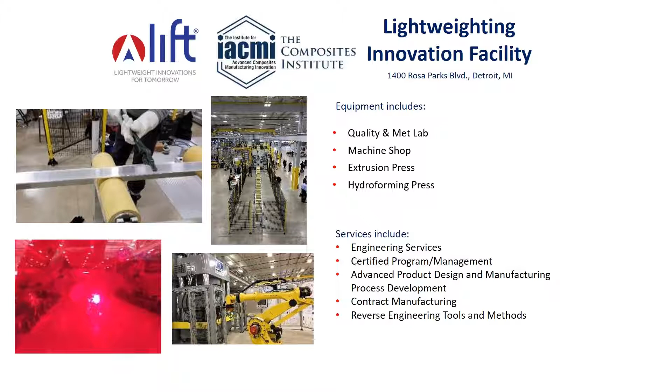You can learn more about a number of our projects as well as our education and workforce development initiatives on our website at lift.technology. As I mentioned, we are based here in Detroit, so please come by and visit if you're in town. We share space in our lab with IACMI, another Manufacturing USA Institute, which focuses on composite materials, so we have lightweight metals and composites in the same place. You can also follow us on social media at News from LIFT to tell the world about the good things you heard today from Munro and Associates, and when you come visit us here in Detroit.

A few highlights from the lab I mentioned, our lightweight innovation facility that we share with IACMI here in Detroit. You can see on your screen a number of the large-scale pieces of equipment we have ready for your use. So please give us a call if you have ideas for lightweighting projects, or a problem you're looking to solve. Contact us at lift.technology, come visit us, and we'd be happy to work with you through those problems with our in-house engineers or any of our network experts.

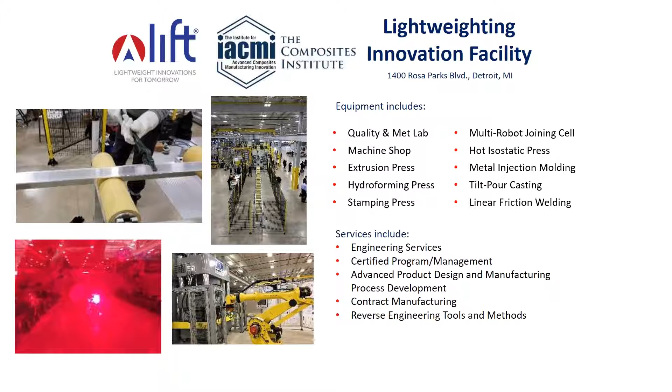I'll highlight the linear friction welding machine on the equipment list. It's in the process of being installed — we are thrilled to have that piece of machinery. We just took possession of it last month, so it is being installed now. It is the largest linear friction welder available in the country. If you wanted to do the kind of work you can do with this machine, you'd have to fly across the pond to Europe. But we are very proud to have it here in Detroit.

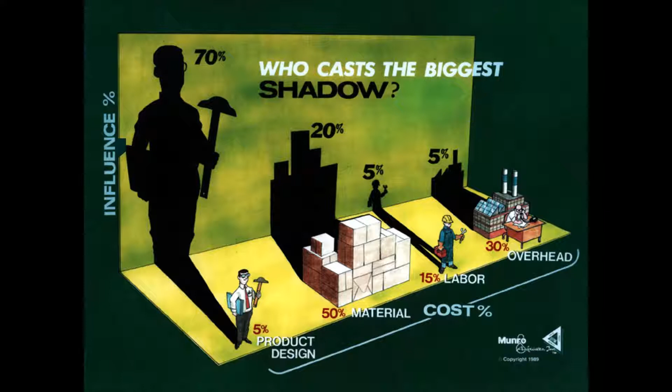And so moving over to the right, you can see in your budget, you may have 5% for product design, 50% material, 15% for labor, and 30% for overhead. And what this means is that all the way out on the right-hand side where you're manufacturing and dealing with overhead, yeah, we're all familiar with VAVE programs, but a VAVE effort, once you're in manufacturing production, is only going to have perhaps a 5% impact on the total cost of that product. And if you can bring home a 5% cost save, a lot of folks are really excited about that.

But what this chart says is that you, as an engineer and a professional in this industry, should be devoting more attention to the left-hand side of the world. That would be your product design, and you should be bringing in manufacturing, materials, purchasing, and everyone driving towards a common goal that is going to make the company more profitable.

So in the past, yeah, you've seen these BASF commercials. They don't make the product, they make it better. Well, we don't make anything here at Munro and Associates, but what we do is we bring value, quality, and profitability to the customers that we collaborate with.

We do that through lean design. In fact, lean design is a registered trademark of Munro and Associates, so that's how long we've been at it. And it's important, especially these days, where companies are measured by their stock performance, not just the profitability of the company, but profitability drives stock value.

And we have a number of examples. If you folks have time to look at some of my LinkedIn articles, you'll see there's a correlation between lean design, profitability, and shareholder value. So let's get on with the presentation.

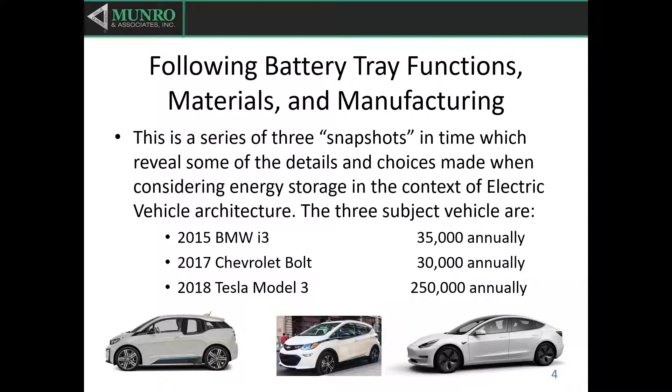The 3 subject vehicles that I'm touching upon today are the BMW i3, Chevy Bolt, and most recently we did work on the Tesla Model 3. Off on the right, you see I'm talking here about what the annual volumes are, and this is very important when you start to calculate the profitability of a product. Obviously, you want to match your manufacturing methodology to the volume that you're ultimately going to sell that vehicle in.

And just another word now, BMW has hit 35,000. That was their peak number for the BMW i3. Chevy Bolt is approaching 30,000 annually now, and I would expect to see that number growing, but not as rapidly as Tesla Model 3. They're over 200,000 units a year now, and they're going at this from a volume perspective. They're really trying to change the marketplace, and quite frankly, there's a lot of really brilliant engineering in that product. We'll set aside the fit and finish for now.

Okay, so first vehicle up by the vintage of the vehicle was the BMW i3 with the range extender. And these are just some of the vehicle specifications. When we talk about the range here, we're strictly talking about battery range, and this is 150 miles. The vehicle weight, 3,000 pounds, is really rather light when you start comparing it to the Chevy Bolt and the Tesla. Tesla has a body structure which is incredibly robust, and in the opinion of many, including Sandy Munro, a bit over-engineered.

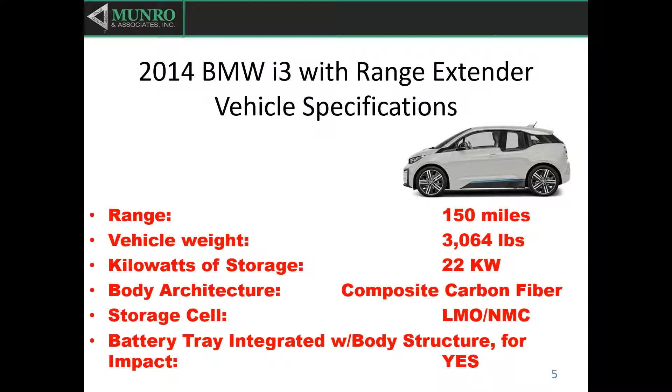We put all of our subsystems into what we describe as zones, because we don't always have the manufacturer's part numbering system to work with, and zones are common, so it doesn't matter if we're looking at a Fiat, a Ford, or a Chevrolet. All of those subsystems are broken out into the same zones.

We call zone 4 powertrain and driveline, the bin that we're going to be putting all of our battery, electronics, and cooling systems in. The last line on this page here is kind of important: this battery tray is integrated with the body structure for vehicle impacts. So FMVSS 214 is something that you cannot meet without having the battery tray in place.

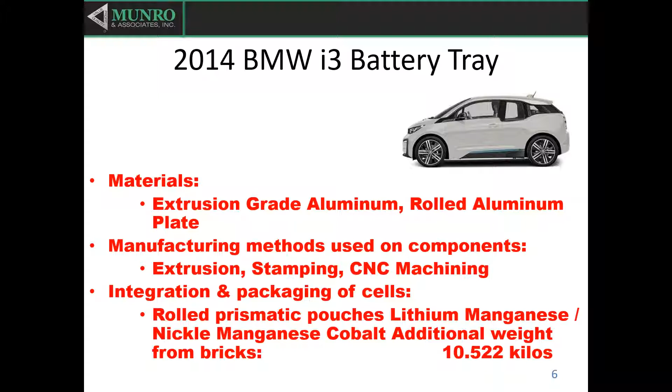Basically what you'll see when you analyze the structure of the vehicle is there's a big front end aluminum subframe, a big rear end aluminum subframe, and then tying those two together is the aluminum battery tray structure in between. The materials in the battery tray for the BMW include extrusion grade aluminum and rolled aluminum plate, that's for the base of it, and then there's a thin sheet metal aluminum cover that goes on top of it just to seal out the system from the environment. The manufacturing methods used on the components in this battery tray are extrusion, stamping, and a lot of CNC machining.

Integration of and packaging of the cells. Now, 3 different manufacturers have made the cells for these vehicles. BMW has Samsung prismatic pouches with a manganese, nickel, cobalt additional weight from the bricks — I'm going to talk about the bricks in just a moment — is 10.52 kilos. These bricks are basically the containers which protect the cells, the anodes and cathodes, from any damage in the vehicle environment.

The BMW battery tray is all aluminum. Because the assembly is completely done in aluminum, galvanic issues will not arise as they do in the Tesla Model 3 tray assembly. We'll talk in a moment about that.

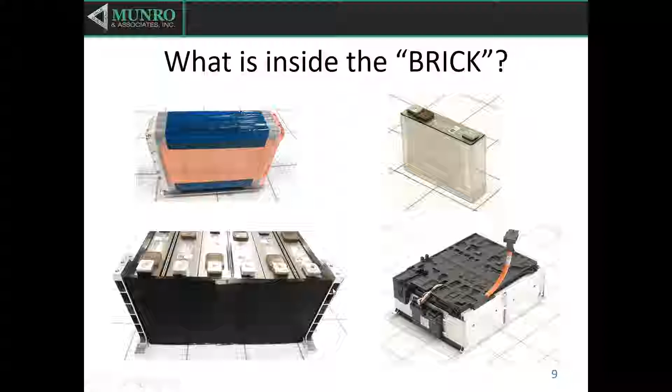Now, all of those little individual cans are placed — you can see them in the lower left-hand corner. There are 6 being placed here, and this is kind of a unique breakout of the battery tray because it has this end weldment taken off, and you're looking directly into that brick assembly. This is an insulator for thermal and any shifting that might occur within that brick, and there's very little movement within there, I can tell you that.

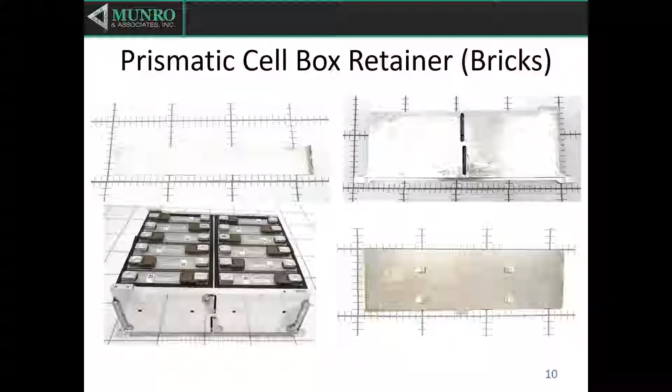It costs you nothing. So talking a little bit about what that brick is made of, kind of hard to see here in the upper left-hand corner, but there's a giant strap that ties these together. This is out here on the end of the brick, and internal to the brick, they're flanged in opposite directions. Wire welds, lots and lots of wire welds.

Here's the front plate. This is a flat stamping that has these piercings through it. And in the upper right-hand corner, you can see what you were looking into here.

This is an extrusion profile that is then subsequently machined. You can see all of this is being cut out, and then the attachments are being set up in the lower corners of that. So that's what that extrusion looks like in a side view, not an end view. You can see where they've cut through it in order to put these straps in the center, right through the assembly, and the outer plates onto the ends of it.

So there's a lot of material involved here, and like I said, over 20 pounds of weight ultimately in the final assembly. So we're going to talk a little bit about what the tray, the base of this system, is composed of.

There is a stamping on the bottom of the tray assembly, and that's the only stamped part aside from the lid in this whole battery assembly. Everything else is extruded, and you can see, again, lots of wire welds.

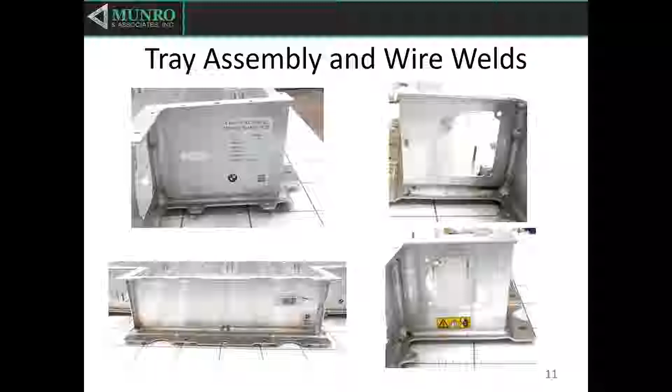This is at the front of the battery. You can see access ports here for the heating, cooling, electronics to come through. Another access port over here. A lot of fixturing is put into this.

And again, as you look at these welded corners, you can see that there's a lot of grinding being done on this. It's all managed very cleanly. But what I can say about this particular assembly is that this can be done almost anywhere.

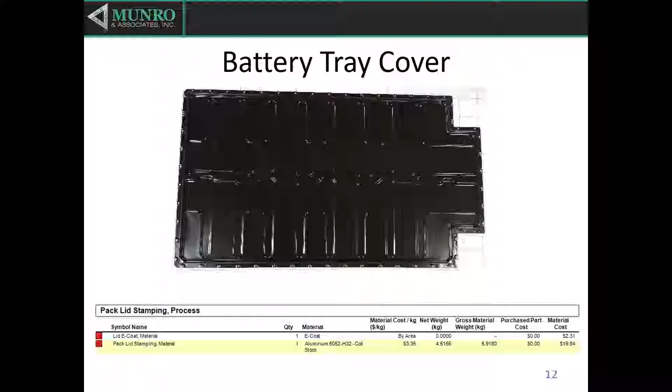You can see that the profile of the lower stamped plate is very thin, right? And because they're using all aluminum, there's no coatings on here, no galvanic reactions that they have to worry about, like on the Tesla, and I'll be showing you that in a moment. But what you see is that with this stamping and these extrusions, this can be manufactured just about anywhere in the world. Aluminum extrusions are quite common. There's nothing special at all about this base plate stamping.

This is the battery tray cover, and you can see I was asked to pull in some of the cost and data here, and I wanted to do that for this part. You can see that the E-coat is $2.31, and the stamping itself is at $19.84, and I believe that's with the coating on it.

So this, again, is one of the detailed breakdowns that we went through on the BMW. Every single part analyzed, and when you come out and visit, we can show you how our analysis tool, Design Profit, is used to track all of those costs and to order them in a sequence which reflects the actual assembly of the product in production.

So let's get to that base plate. We'll talk a little bit about the number of parts. 54 parts, 40 fasteners, 14 individual unique part numbers, 790 process steps to put this baby together. 30 fastenings, yes. And this is kind of important here, right the first time.

This is one of the methods and one of the metrics that we're used to track quality. And we can help you determine what your CPK value is for your process. We have a methodology, again, within Design Profit that we use to determine what that number is. There's formula bars in there.

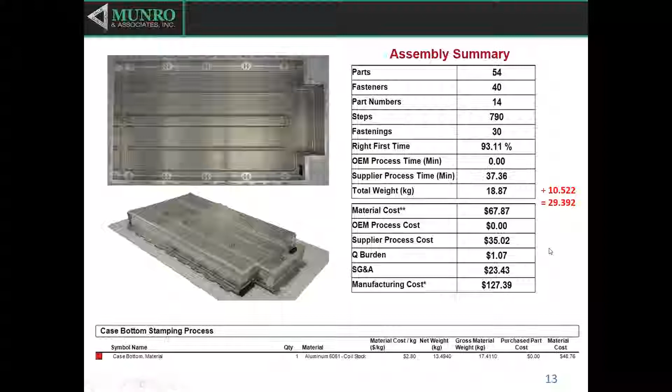18.87 kilograms. Now, having said that, you have to look out here on the right and see that there's an additional 10.5 kilograms of weight associated to those bricks I showed you just before this. So all of those bricks go inside here.

Okay, so underneath the battery cells, let's start up here on the upper left-hand corner. You can see those bricks in place, and underneath it is the cooling channel. Go back one frame. You can see these reliefs stamped into the lower component of the battery tray. That is where these cooling and heating management elements are put.

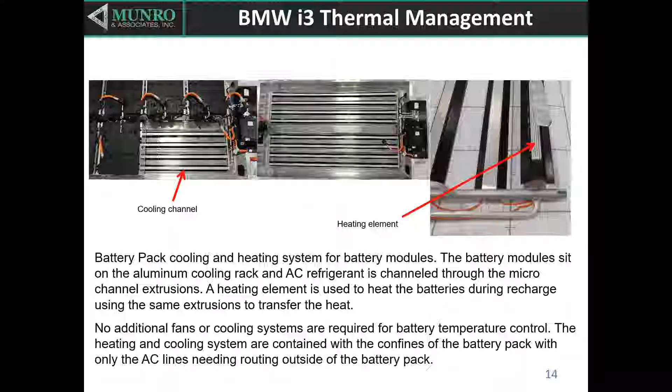So on top of that plastic carrier are two elements. One is the heating element, which goes underneath the aluminum ribbon that comes off of the manifold that they run an AC refrigerant through. So this is not a typical glycol system for managing the thermals here. This is actually AC refrigerant being run through these micro channels.

This is an advantage in that there are no heating and cooling requirements aside from that AC line that have to get into the battery pack. I'll show you a little bit more when we get to the Tesla that identifies how complex this heating and cooling thermal management can become.

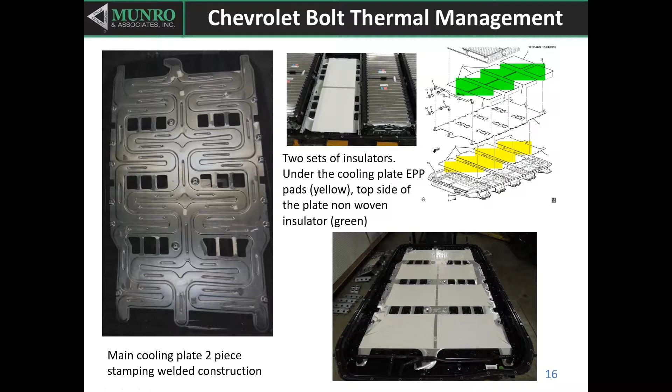These lower plates that you see here in yellow are expanded polypropylene foam. What they're doing is basically two functions. One, yes, they have thermal properties, and they're going to prevent road heat from coming through that steel pan and loading up your battery cells with heat from the road, reflected heat. So the EPP is an effective thermal insulator, but more importantly, it sits underneath the battery tray, underneath the battery cooling tray and the cells themselves, and it provides some impact and vibration isolation. Of course, you've probably been familiar with expanded polypropylene foam products in bumper applications. It is a great energy absorber, and therefore it seems like a natural fit in this application.

Not a bad job with regard to management of the thermals here.

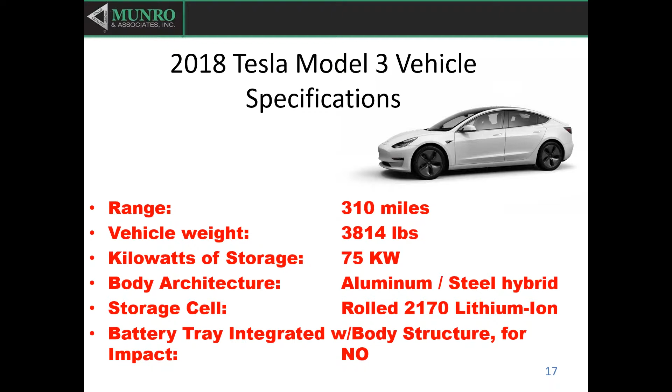This battery tray has no impact on the overall global torsional stiffness of the vehicle. You can remove the battery tray and it only has 3% impact on the global torsional stiffness of this vehicle. So it's really kind of a body structure that stands without the battery trays. However, in the future, I would look to see more of these battery trays integrated into the body structure and helping to provide the performance that's required for FMVSS 214, side impact primarily.

Talk a little bit about what this battery tray looks like coming out of the vehicle. You can see this is the tray as it comes out. That's a full complete assembly. This is at the back of the vehicle. This comes up under the rear seat, and this is where a lot of the thermal management is.

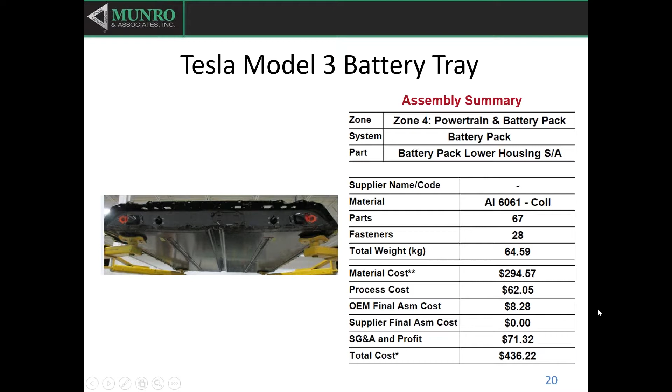So you can see a lot less parts involved in this battery tray, a lot less fasteners than the BMW. The total weight - you need to go back and compare both the bricks and the battery tray of the BMW, and then understand that it's about 1/3 of the storage in terms of kilowatt hours that the Tesla has. So the Tesla really has tremendous density and is delivering more power per pound than any other system we have ever analyzed here at Munro and Associates.

Talk a little bit about what it's made of. Again, you can see upper left-hand corner, this is the draw that is on the forward edge and the rearward edge of the battery tray. Due to the length of the battery tray and the weight of the cells, you can see they have incorporated into the construction a couple of extrusions - an extrusion here cut on an angle, and this is an extrusion I'll call a rail, okay?

These are adhesively bonded in, and also they have friction stir welds - friction spot welds, I should say. You can see them along the rail here. And that red line, that is the adhesive underneath it. It is then bolted to this extrusion, and this extrusion here goes through the front of the battery case and bolts into this casting. It's either a casting or a forging here. I have to pull it out and do analysis on it.

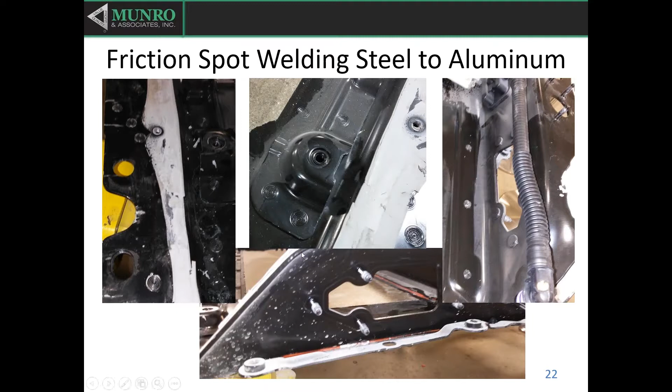On the front and the rear edge, there are aluminum weldments. Those are friction spot welded into place and adhesively bonded. Note that the entire battery tray assembly is coated - it's painted to prevent galvanic reactions, and also this particular series of aluminum is not as resistant to corrosion as the material that was used in the BMW.

Talk a little bit about what they're welding on here. Okay, this is a steel component. On the periphery, there are 4 of these stampings that are welded into place, and they hold the outboard edges of those logs in place and keep them from moving inside of the battery tray. On the back edge here, again, you can see this is a steel stamping, and it is both friction spot welded and adhesively bonded into place. Those are the friction spot welds that you see right there.

Now there is another stamping in the front. So there's a total of 4 steel stampings, and that's why they had to coat this battery tray so that there were no galvanic reactions.

I'm going to talk a little bit about thermal management in the Tesla, pardon me. Common terminations out here at the ends of these ribbons keep the cost low and make it a very repeatable system.

Now, just a word about the patented Tesla cooling tube. This tube is rather unique, unlike what you're seeing in this illustration in the lower center portion. Out on the end here, you see these terminations, instead of looping together in this manifold shape out on the end.

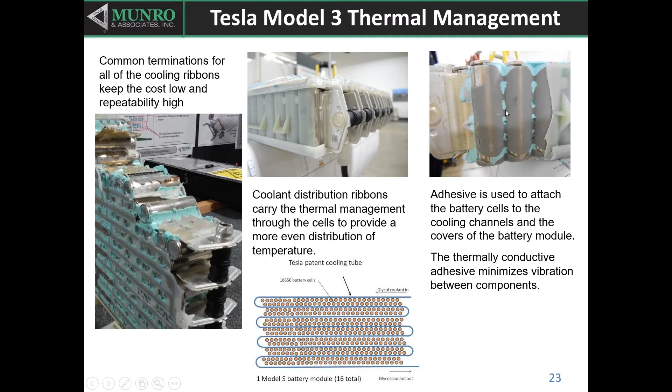Talk a little bit more about comparing each one of these systems. This is powertrain and battery pack total weight. I like this illustration because it shows you the composite battery cover for the Chevy Bolt, and you can see the cost of these respective systems is pretty close.

BMW has the least storage power and range of all. When you move into the Chevy Bolt, you've got at least twice the storage energy of the BMW, and only about 100 kilograms more. Really a dynamic vehicle. You get into that little Chevy Bolt, and it has an equivalent of 200 horsepower, so it really runs like a demon and sticks to the road with the extra weight of the vehicle, kind of like glue.

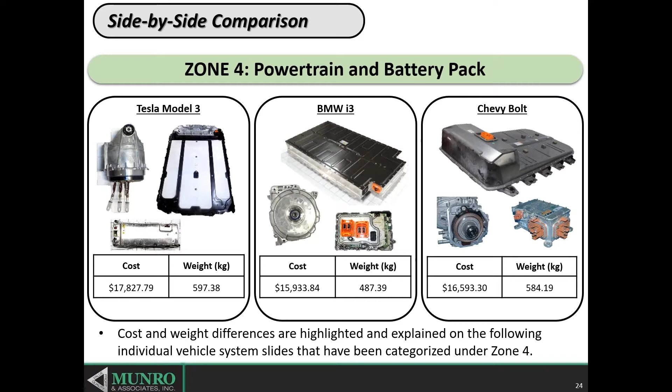So really a very nice execution. If you want the best EV for the smallest amount of dollars, you might take a look at that Chevy Bolt. These are the battery packs and the respective prices and weights for those battery packs. You can see these are some pretty significant structures, approaching 1,000 pounds here, so these are not lightweight. They add a whole lot to the overall weight of the vehicle.

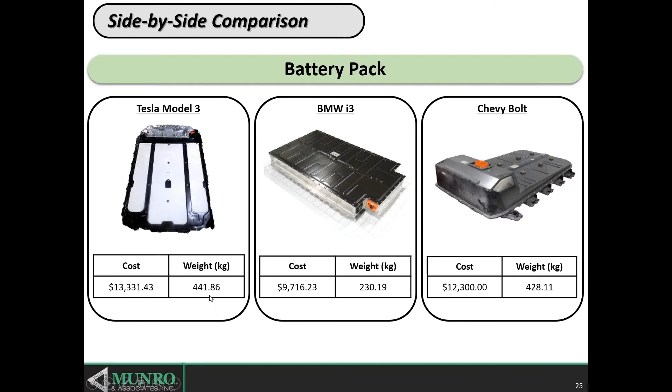Now talk about material distribution, and this is the one that really threw me as I looked at it the first time. Draw your attention to the BMW composite body shell, and everybody's thinking, well, it's a plastic car, they've avoided using a lot of metal. But look here, in brown, this is the key for aluminum, and they're using almost twice as much aluminum as anyone else. Even though Tesla has an aluminum steel hybrid body structure, they're still not using near as much aluminum as the folks at BMW. So when you think of that plastic composite vehicle, remember that the biggest portion of its weight is actually in aluminum.

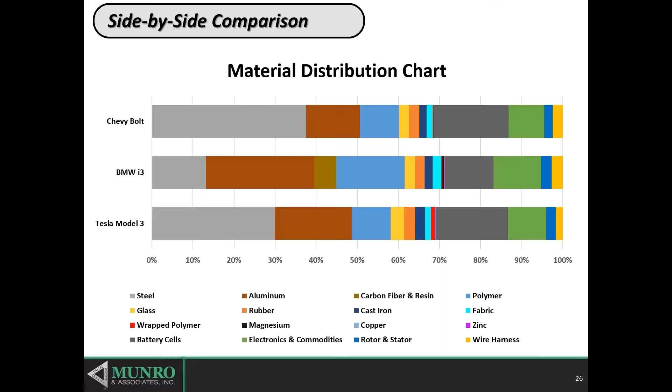The high specific energy absorption and capacity of aluminum makes it an ideal candidate for a protection plate underneath the cells, as in Tesla, where they demonstrated in the Model 3 a 6061 series aluminum, very puncture resistant. Integration of liquid cooling strategy with a robust structure for both body integrity and cell protection is a trend for aluminum enclosures, which you will see more of in the future, we believe, and further advances in high-strength aluminum.

These are the 6,000, the 7,000 series alloys, such as the Novelis brands in the 650 and 700 series. They have tensile strengths which are in the 400 to 600 megapascal range, with specific tensile strengths higher than press-hardened steel. So there's really some great advancements in aluminum that will allow you to create lightweight structures with little or no steel in them.

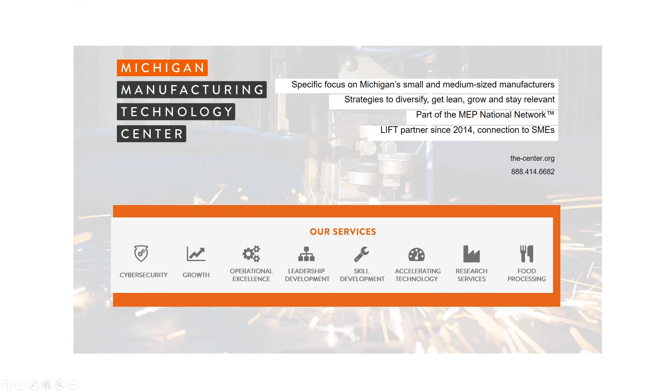Unmute my speaker. Yes, 3D printing is something that is coming into some high volume applications. Recently, I saw an application for a seat belt anchorage in a GM SUV, running in approximately 200,000 units a year. However, the size of 3D printed parts has a large impact on the cycle time. So I do believe that some smaller components may end up being 3D printed. I don't see it for the larger chunks of these systems.

Speaking of the battery packs you went over, are any of them engineered for ease of replacement, like quick changeouts?

Well, they are not exactly what you would call engineered for quick change out. However, the battery system of the BMW and the Chevy Bolt are both more serviceable than the Tesla 3. The Tesla 3 has 4 chunks that you can attend to and service. Contrast that to the Bolt, which has what looks like a library shelf of cells, all side by side. So if you can identify which cell is problematic, that cell can be removed. When you start talking about the Tesla, you have to replace that entire log. So servicing is going to be much more expensive on the Tesla than it would be for either the BMW or the Chevy Bolt.